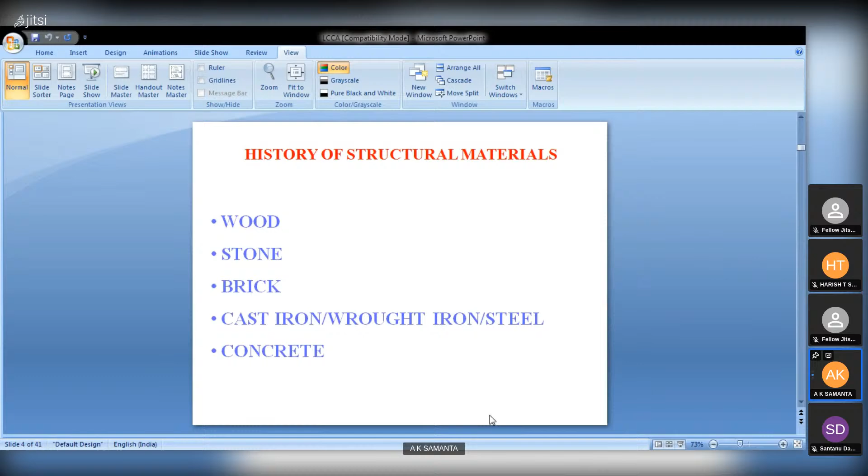But if the alternative is there, steel and concrete, what should we adopt? That is the main theme, the main objective of this presentation, and how to carry that out. Let us come. Now, life cycle cost analysis is an evaluation technique of structure management by which economy is decided based on the consideration of all associated costs.

The cost may be direct, the cost may be indirect, known or unknown. We know the cost is there, but the cost cannot be quantified. That's why many known and unknown costs are there. Suppose today my vehicle is emitting carbon dioxide or carbon monoxide to the atmosphere, but exactly the person who gets disease from that emission is not known to me, but certainly it has impacted someone's life. So the cost may be known or unknown.

The cost may be created by me, the cost may be created by others for which I am paying. Then present and future, all the costs will be involved in that. So we have to estimate all the costs, then we have to sum up all the costs, then only we can get exactly the life cycle cost of any structure. The annual operation, and what is the need?

From our experience, we have seen that if a structure is constructed for, suppose, 1,000 rupees, then as long as the structure is in its life and functioning, around 50% of its construction cost, 58% or 60% or 50%, is its maintenance cost. So maintenance cost we also cannot ignore, because that also impacts our life. Whenever we have one product, its maintenance is also a very considerable cost.

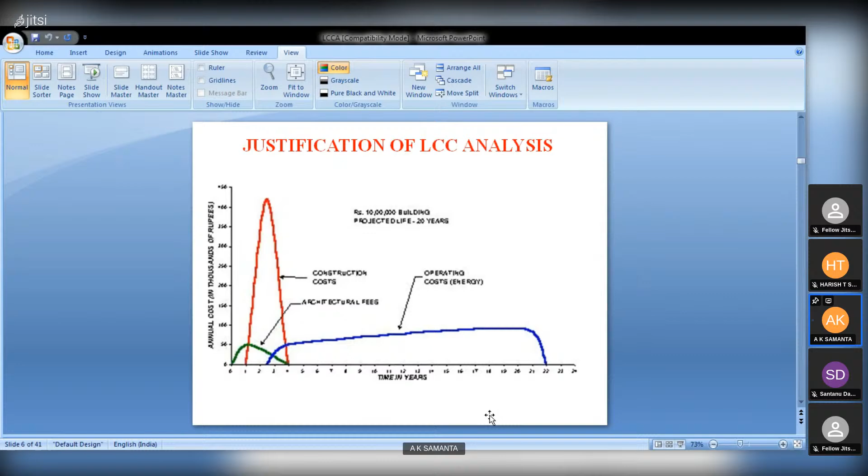Now, justification of the life cycle cost: as I have told you, the construction cost may be 100, and I compare the other costs. One is your architectural cost for the structure, another is construction cost, another is operating cost or maintenance cost. These are all direct costs depicted in this graph, but other costs are also there.

Though all the codes are under regular revision, because the quantification of some costs is taking some time based on the data. So as those data become available, we are changing the code and we are changing the pattern of our calculation. Now other codes are there. One American code, you can see E917, the ASTM standard practice for measuring life cycle cost of buildings and building systems. So it does not refer to the bridge, it is talking about the building.

Another is A930, their standard practice for life cycle cost analysis of corrugated metal pipe used for culverts and storm sewers. This may not be so relevant, but this code will give a lot of idea how to calculate different indirect costs. And our Bureau of Indian Standards has published a standard, 13174, life cycle costing. It has two parts, and part 2 is very important; it is being revised, and INSDAG is involved in that revision. So we are trying our best to develop our Indian standard.

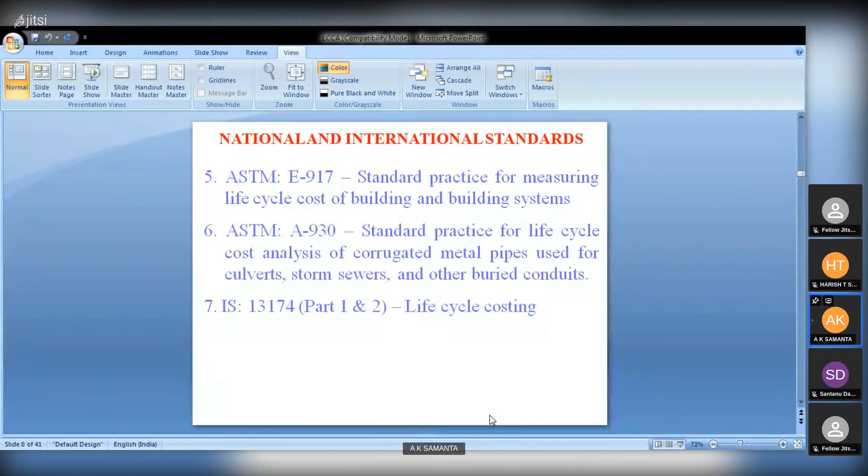Now, some terminology we need to understand before this life cycle cost. Base case. The base case is the alternative, usually having the lowest initial cost, against which other alternatives are compared. For example, if I want to construct my building, my first preference is reinforced concrete.

Now, I think whether it will be a reinforced concrete building or a steel building, and even a steel building has a number of types, whether we use beams, angles, channels, hollow sections or plate sections. So based on this, there are so many alternatives. So the base case is our reinforced concrete building, and the others are the alternatives. Alternatives will be assessed with respect to the base case, meaning the concrete building.

Then base date. Base date is the date on which we are calculating the cost, because there are some future costs involved. We will not consider any past cost. The costs which have already been incurred, we cannot revert. But the future cost we can take care of, with some control over how to reduce it. So the base date may be any date, maybe before construction of the structure, maybe after construction. It is the date on which we are calculating the cost, including the future cost and indirect cost.

Then direct cost. What is the direct cost method? Nowadays, almost all government or public structures are decided by the direct cost. These are the costs which are paid in rupees, in our currency, on account of anything related to the structure. Direct cost may be the cost of material of the structure, payment to the contractor, payment to the designer, and likewise; this can be present or future cost. So direct cost means the cost which, on paper, we actually pay directly.

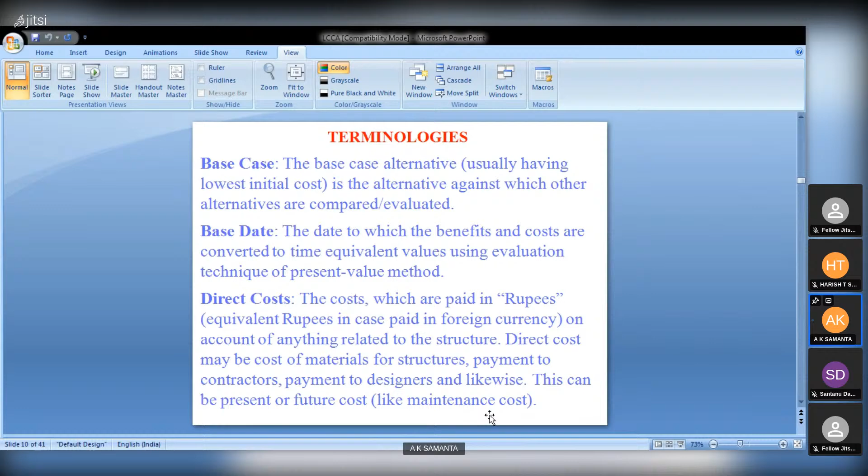Indirect costs are the costs that are paid but may not be precisely realized as being due to the particular structure being evaluated. The cost of the overhead of the organization, additional staff for accounts, the personnel department, and additional management required to run the organization are some of the indirect costs. So these costs cannot be exactly categorized as being particularly for this structure, but they are anyway borne by the organization, maybe PWD, maybe we who own the structure. Indirect cost is always assessed as some percentage of the total direct cost.

Then known cost. These are the costs which are identified and quantified. So we know these costs. Please try to understand these two things: that we have identified it, because if we cannot identify what the cost is, it cannot be a known cost, it will be an unknown cost, and that we have quantified it. These may be direct or indirect. These costs are sometimes borne by the department responsible for design and construction, and sometimes by a different department at different times, and maintenance cost is one such cost.

You know, maintenance is carried out by the same department but not by the same people. So if today one government department is assigned to construct a bridge, it will consider how much cost will be paid by that organization within the coming 1 or 2 years. It may not consider the cost that will be paid after 10 years during maintenance. Because there are some limitations also. One limitation is that calculating all those costs is a difficult proposition. Another is that we will unnecessarily complicate our decision making. The direct cost method is the easiest way of calculating the structure's cost, because that is the initial cost. Future cost we are just ignoring.

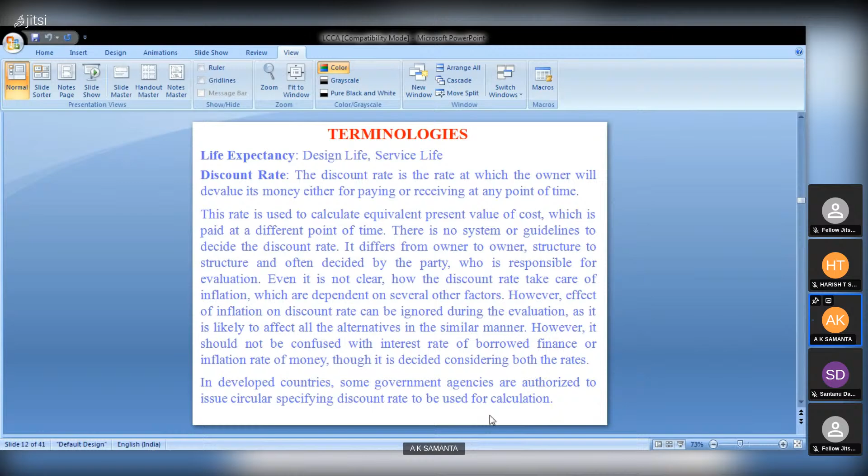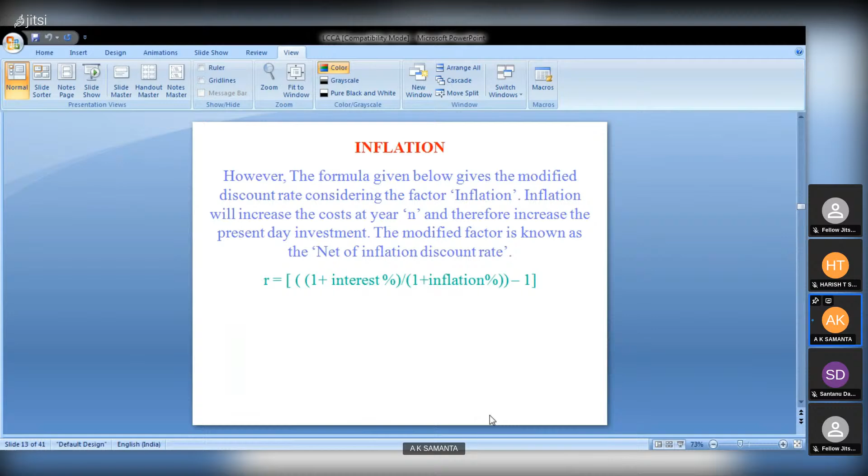Inflation will increase the cost at year n, therefore increasing the present day investment. This modified factor is known as the net of inflation discount rate per year. Here it is given per year, as you can see in the formula, which is the calculation formula for that discount rate.

Then another thing, residual value. Let me suppose a steel structure, even a small one, maybe 100 kg or 200 kg weight, that has ended its service life. If you leave the steel on the road, the next morning you will find someone has taken it, because the steel has some resale value.

But in reverse, if a concrete structure is demolished on the road, nobody is willing to take that demolished material or debris. To discard or clean the road, we need to pay for cleaning or removing the debris. That is the basic difference between concrete and steel.

Steel is a recyclable material, but concrete is not. Once concrete has finished its function, it is simply waste, only used for earth filling or similar purposes. It cannot be used for any scientific purpose.

Then present value: the costs for a structure are paid at different points of time, but for evaluation purposes, the numerical value of the cost should be converted to an equivalent present day cost. So present day value A is the actual value paid after some time, divided by 1 plus D, whole to the power n, where n is the number of years.

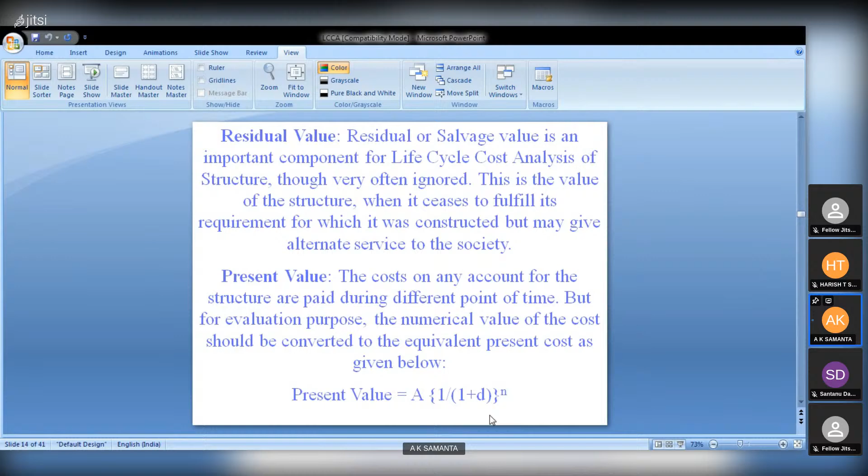That is the present value calculation formula, converting a future cost to the present cost. The life cycle cost is the sum of all costs.

If we have understood all costs - sum of all cost, initial investment cost, present value of replacement cost, present value of maintenance cost, resale salvage cost (negative for calculation, that's exactly salvage value, as we are getting it back it should be negative in nature), etc. - this is known as the life cycle cost, the summation of all costs which we can quantify.

Here you have to note that impact on environment or impact on society is not included, because even today we are not in a position to calculate these costs directly, whether any pollution has taken place during the structure's use or from vehicles. We are really not in a position to assess this. I don't know when it will be possible, but experts are surveying and trying to find a way to determine this cost.

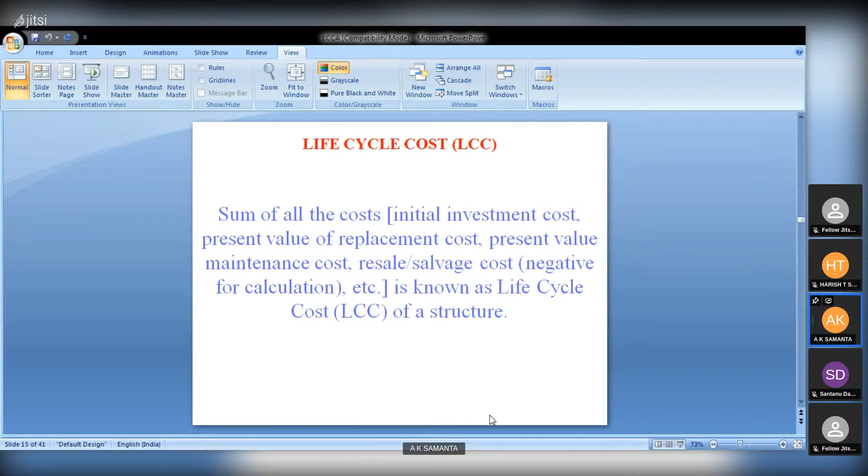Then the methodology of analysis: defining the requirement the structure is considered to fulfill. First, we have to define what the necessity is for having the structure in our society, maybe on the road or at some other place. So we have to define the structure's functionality first.

Then determination of different types of specifications or alternatives. Alternatives may differ by material, by design, by construction methodology, by maintenance procedure, etc., for a structure which will serve the same purpose for which it has been conceptualized.

So first we need to define the need of the structure or specification of the structure, and then we have to think over the other type of structure which can fulfill our same requirement.

Then establish common assumptions such as study period, discount rate, etc., for all the alternatives. Whatever common assumption we cannot establish, we may ignore it for the time being.

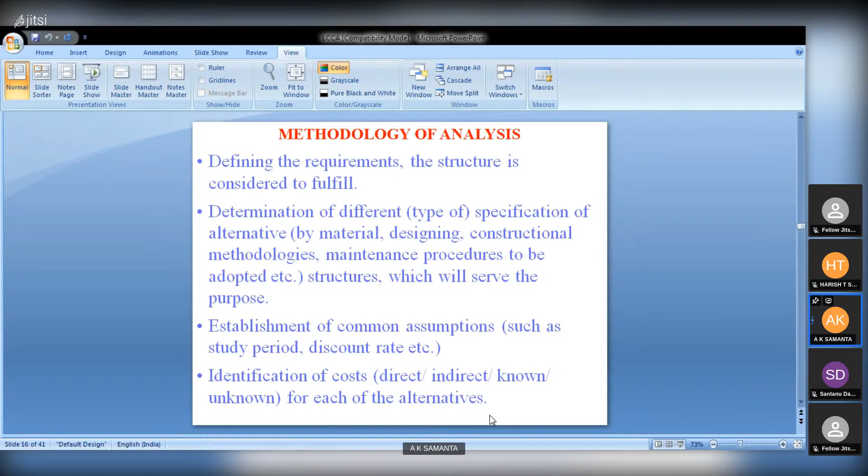Then identification of all cost. Whatever cost we have identified, we have to convert it into monetary terms. So direct and indirect, known, unknown, let us first identify the cost, then assign numerical values to the cost of each alternative.

If some of the cost cannot be identified, the same cost may be ignored for each of the alternatives. However, if the cost is not applicable for all the alternatives, assessment of the cost is desirable to get the actual evaluation. If necessary, imagination based on experience and past data can be applied with justification for the purpose.

So what does it tell? That the cost is known or unknown. Once it is known, we have to give some numerical value to all costs. But we will find some costs where really we cannot put a value to that cost.

As an example, pollution, carbon emission, water pollution, earth excavation, consumption of iron ores, consumption of soils, or defertilization of agricultural land. So all these things are there. We know these are costs, but they cannot be estimated at the instant.

So in that case, it is suggested by experts that if any cost cannot be quantified, it may be ignored for the time being.

But if we want our calculation to be more accurate, then maybe we have to determine the cost based on our past experience. If the data is not readily available, but we have some experience in that field, that way also we can calculate the cost.

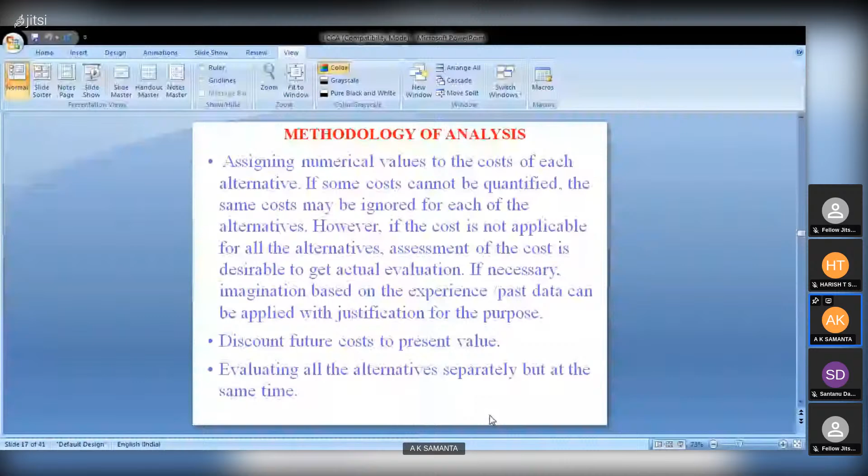Then consideration of non-quantifiable cost and benefits. You know what that means? We know the cost is there—pollution of air, pollution of water, pollution of soils. We know these costs are there, but they are not quantifiable.

Then what do we have to do? If it is really dangerous for our society, we have to take care of it irrespective of its numerical value, but we have to take care. That's why, for example, to reduce pollution, we are upgrading our vehicles to e-vehicles gradually so that they become non-pollutant. We know the effect is severe, but we are not in a position to assess it numerically, yet steps are taken.

Consideration of uncertainty in input values. Once we have decided the input value, it will have three types of numerical data: one is optimistic, another pessimistic, and another highly expected. Out of these we have to take some average value, and that average value will be taken for all the costs.

Then computation of supplementary measures of relative economic performance. Relative economic performance means suppose a structure is constructed, but it has some other values also—that also we may consider.

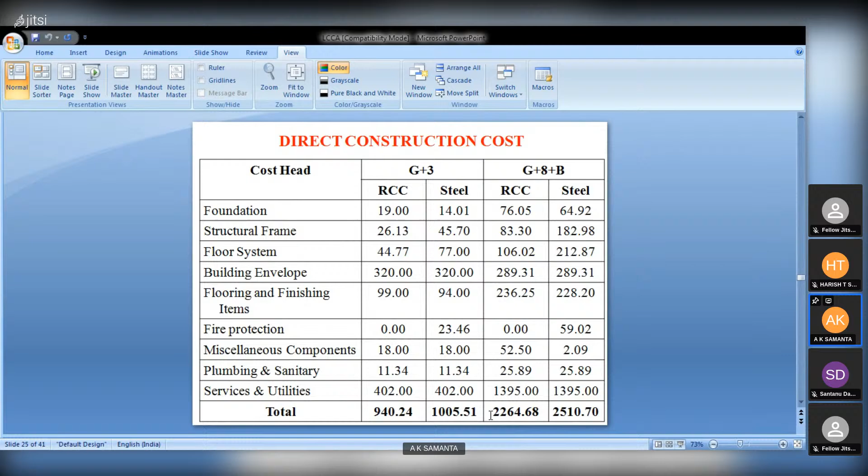But when we take the initial cost and add the future cost, which includes regular maintenance cost, periodic maintenance cost, and repair value, these data we took from experts who understand the subject, as this data is not really available in authenticated form. So we collected it from experts, averaged it, and took some optimum value.

Then we found that since the steel structure will last longer and has some resale value, and since it gives more open column-free space in a steel structure which can be utilized for additional rental, steel becomes slightly cheaper, around 10% cheaper compared to RCC.

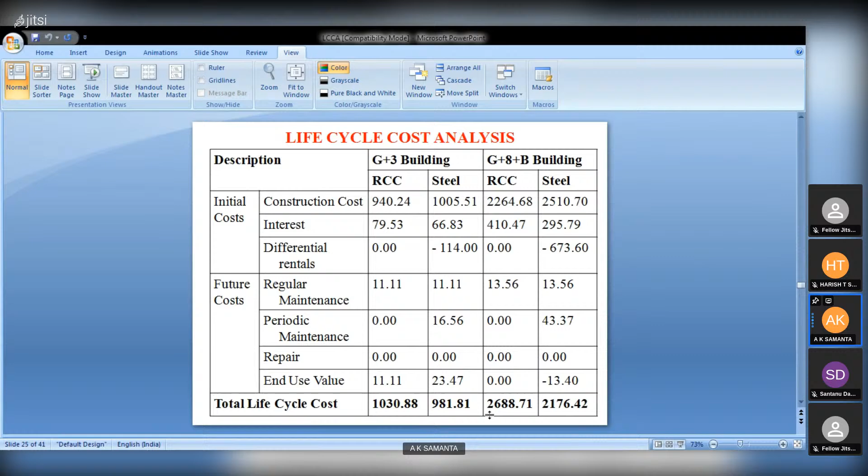However, again I am telling you, this is not a conclusive report. You may disagree, but I think you should carry out this type of study on your own.

Then conclusion: in both the cases, steel options are cheaper than concrete, as we have shown. It is observed that indirect costs like traffic diversion, cost during construction, space utilization, and impact on environment are not considered. Though we knew these costs, we really did not get any data for them. And still today, it is the bottleneck for calculating the life cycle cost.

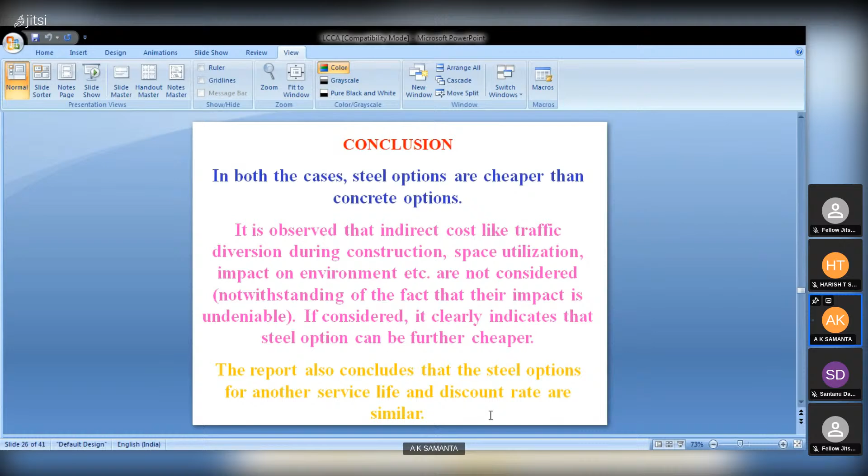The data is available in the European market. Some European standards are there. But we cannot refer to them because the European environment, or impact of environment, is different compared to the Indian scenario. In the Indian scenario, we do not have that data as of today. So in our study, we have ignored those data. And I am telling you with confidence that if those data can somehow be assessed based on experience, the steel structure will be even cheaper.

Another study we have carried out is on a typical urban flyover. The LCC of the steel flyover was discovered to be lower than concrete. This is the only result I have shown; I am not going into details. Everywhere, if we take into consideration maintenance and utilization of the space, these two factors, and the time period of construction, then steel will become cheaper. Otherwise, steel is always costlier on the direct cost method.

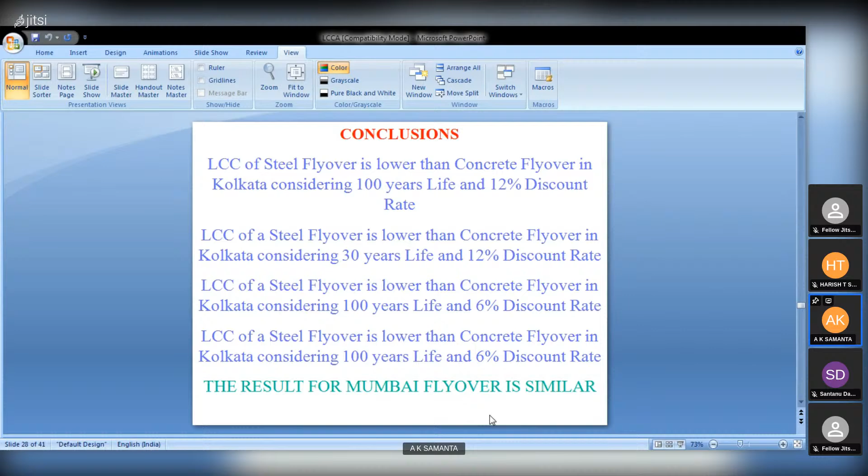Then difficulty. As I have told already, lack of appropriate, relevant, and reliable historical cost information and data is the major disincentive to the use of LCC. Though we know LCC calculation should be done, lack of data is the main bottleneck. Maintenance data has largely been collected for accounting purposes to satisfy the reconciliation of the budget. So those data, basically accounting data, may not be actual data.

There is some deviation. So we have to take an average percentage. Suppose in the past 5 years we have incurred around 10% of initial cost. Maybe in the next 10 years it will be around 5% of initial cost. But over the life we have to average it out. That will be the best result.

The data used by the contractor for tendering purposes have wide variation in output, and these are relatively insignificant when compared with the consistency of maintenance cost records. Furthermore, little information is provided on qualitative nature. So this is another point, as I told yesterday: we are lacking in quality concerns.

When we construct our own private structure, we really try to make it more quality concerned. But when a public structure is concerned, sometimes we see that quality takes the second seat. It is not coming to the first seat. But if the structure is owned by private people, then the structure is really very beautiful. Even in your Bangalore, you will find so.

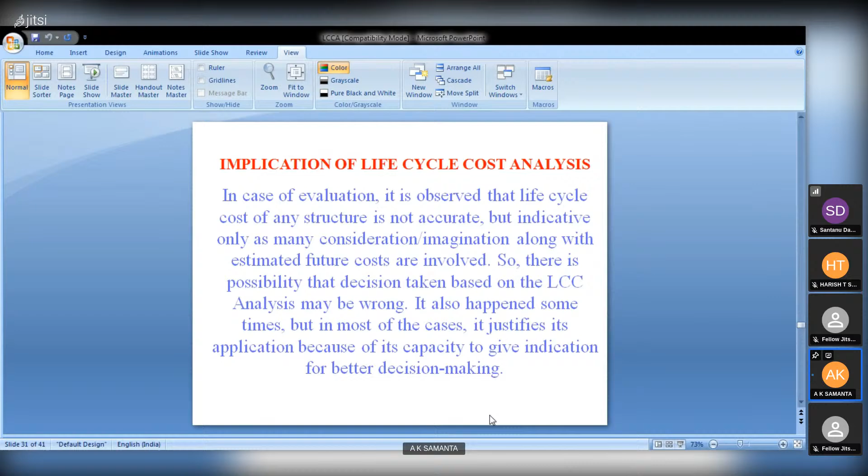Otherwise, if it is a big structure, you will get the better result. Now, an alternative assessment method. This is called the uniform annual cost method. This is another type of life cycle cost analysis.

In the first principle, as IS 14040 says, all the costs will be converted to the day of the calculation. Now they are saying no, as all the costs are not incurred at the first point or during the construction, better we distribute the cost over the period of time. Something like if we take a loan today, we should not consider that the loan will be paid today itself. We think for the coming 5 years, 10 years, we'll be paying every month or every year. So that is the cause.

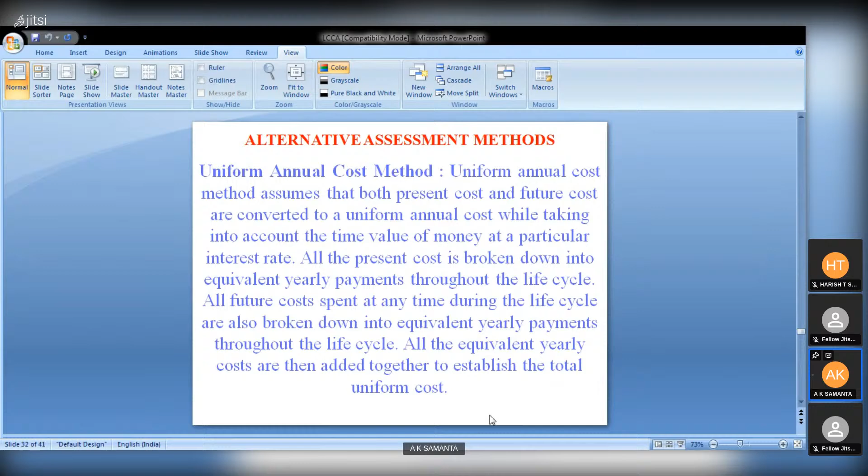If a structure lasts for 100 years, why should we sum all the cost today itself? Let us distribute the cost throughout the life on a per year basis. So in that case, maybe today we have to spend less, but in future we will spend more. That is also another concept. That is called the uniform annual cost method. Here the formula is given.

One example is given: alternative A has an initial cost of 20,000 rupees. Life is expected 20 years. Annual operating cost 2,000 and resale value is 2,000. Another, B, has an initial cost of 21,000, so a little bit higher compared to alternative A. Then estimated for again 20 years. Annual operating cost is a little lower, 1800. Resale value is a little more, 2500. In both cases it will be constructed by borrowed amount, so the rate of interest is 9%.

Now, if it is the annualized method, what should be the cost? That has been calculated for alternative A. As per the formula, the factor has come 0.1095, and the initial cost is exactly 20,000. If today we do not pay, for the 20 years life it will be 2191 every year. Then annual operating cost is 2,000, that is fixed. Resale value is after 20 years, so we have to convert it to every year, so it is now rupees 39.

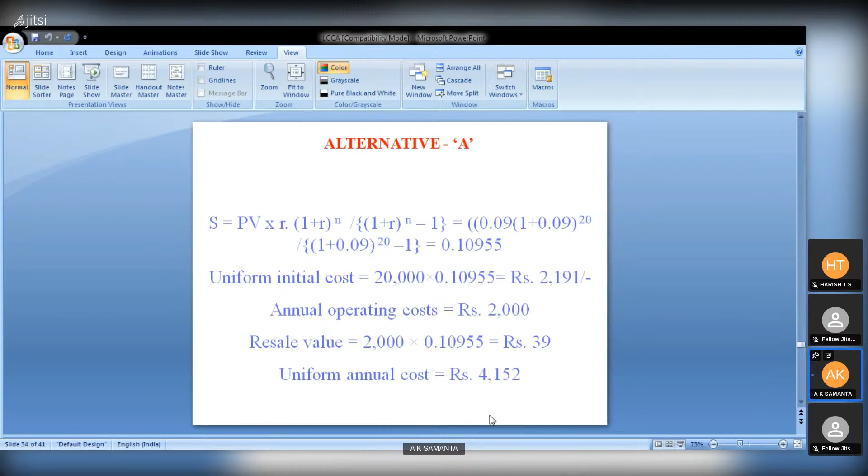So the uniform annual cost, if we distribute the whole cost over the period of 20 years, will be rupees 4152. In similar fashion, if B is calculated, it will be very competitive. Uniform cost will be 4051. So B is cheaper. Though its initial cost is a little bit higher than alternative A, alternative B is the cheaper one if we distribute the whole cost over the 20 years. Exactly in these 20 years, we have constructed the structure with borrowed amount, and we have paid the loan over the 20 years.

Now, hindrances for implementation of this concept. If we know that life cycle cost analysis will give us the better result for assessment or evaluation of any structure, why are we not adopting it? In private life we are adopting it anyway, directly or indirectly. Sometimes we calculate, sometimes we do not. But if the structure is private, certainly it is calculated, debated, and then a decision is made. But for public structures, the thumb rule is that we go for the initial direct cost method.

Why are our public authorities doing the same thing? One thing, inadequacy of funds. As we are a developing country, we always have some fund problem. The problem of funds has been continuing for many years, and is expected to continue for several forthcoming years also. And we have to construct a number of structures for the public. So public authorities will face a crunch of funds over time. As a result, they can never go for life cycle cost analysis, which will direct you to pay more at the initial time.

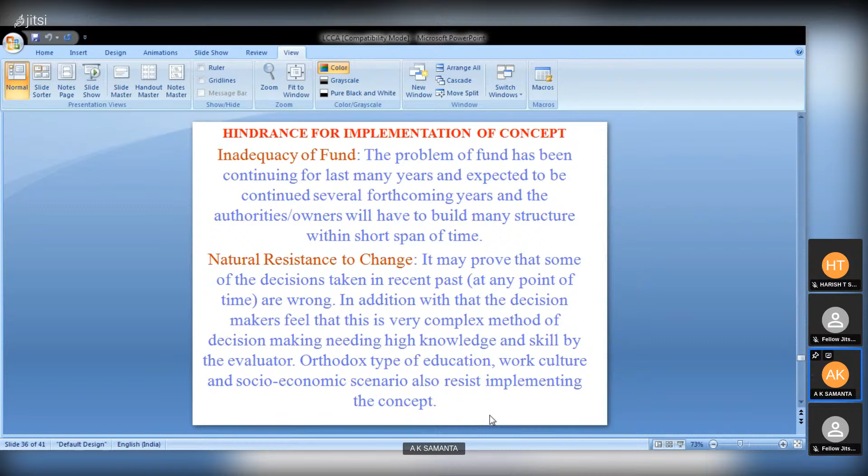Then desirability of the life cycle cost. Already I have described the structure should be evaluated based on the life cycle cost analysis, but some alternatives are also there. Person to person, authority to authority, depending on the fund availability, they have to think of some alternative methods. That life cycle cost is always cheaper, we need not adopt that. What are the other things?

One is net savings. Net savings means savings accrued by the candidate alternative compared to the base alternative over the life cycle, calculated and converted to present value. Suppose today we save a little bit of money, but with that savings maybe we'll invest it in some other place where we'll get more return. Then maybe net savings should be our criteria. So suppose we are having 1,000 crores rupees. Now today, if I estimate a good structure will cost 700 crores, we may not go for that. Rather, we will go for two structures at 500 crore rupees each. So that is called the concept of net saving.

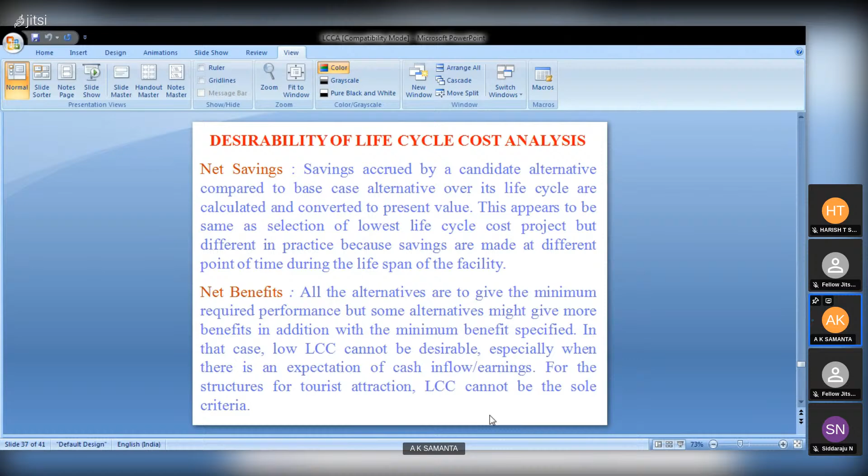Then another is net benefit. As I have told, one purpose is to construct the structure for some functional requirement as it is specified already. But some structures can give some additional return, maybe some extra space will give some extra business, or maybe it will attract some tourists, we can generate some money, or maybe we can rent that additional space and earn some more money. Or if some more space is available inside the building, then we may utilize it for some other purpose. So that is the concept of net benefits.

Then savings to investment ratio. For example, I am giving you a very good example. In India, everybody does not own buildings. Many people prefer that instead of constructing the building, we should go for renting the building, so that it will cost less in my lifetime. Many people don't want to own the building, though everybody aspires to have one building. But really, building construction is costlier, and renting a building space is cheaper. So that's why it is another. Why should I invest in constructing the structure if I can get it on rent in a cheaper mode?

Then another concept is payback. Payback means whatever money we are spending today, what is the payment I'm going to get back? It is very much applicable nowadays. When we are purchasing a taxi, we will give it on rent to a driver, and we will be earning some money with that. So should the taxi be purchased with the borrowed amount or not? If I can earn more money than the EMI of the bank, certainly we should go for the bank loan and start our business. That's why all businesses are normally started with funds borrowed from another organization, bank or authority, and our payback is better than whatever we pay to outside people. So that is the concept of payback.